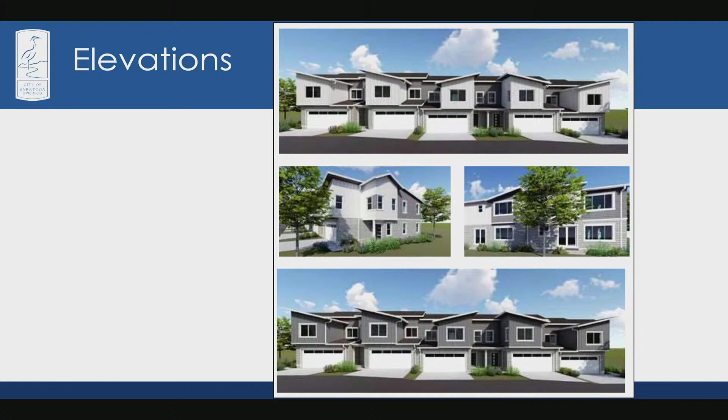So they provided pictures to show what they're going to be building out there as well. It's the same type of development that we've seen in Village 3. And with that, I'd like to turn this back over to the commission for any questions.

Thank you for an excellent presentation. Is the applicant here this evening? Yes, BJ is here. Would you like to add anything to the presentation, if you wanted to? We won't force you, but if you would like to, you certainly can. If you don't mind stating your name and address for the record, sir. BJ Ryan, Lennar Homes, 5370 East Pioneer Fork Road, Salt Lake City, Utah.

We're excited about the community. Again, we have reduced some of the townhomes in the area. This provides better flow throughout the community. It makes the property more functional and puts a little less pressure on us to do retaining walls or other things like that that tend to take away from some of the usability. So we're excited to be here, and we hope you're excited for the project and look forward to a positive response. Thank you. Thanks for being here.

You might have a couple questions from the commission, so if you'd like to sit, you're welcome to sit for just a moment. Thank you for that. I'll turn the time now over to members of the Planning Commission for any questions or comments.

Commissioner Hill. Tippy, again, thank you for that kind of pre-introduction, because I look and, you know, the community plan was February of 2015. It's an ongoing process. As you get closer to building, you want to refine what's going to work for you, and I understand that.

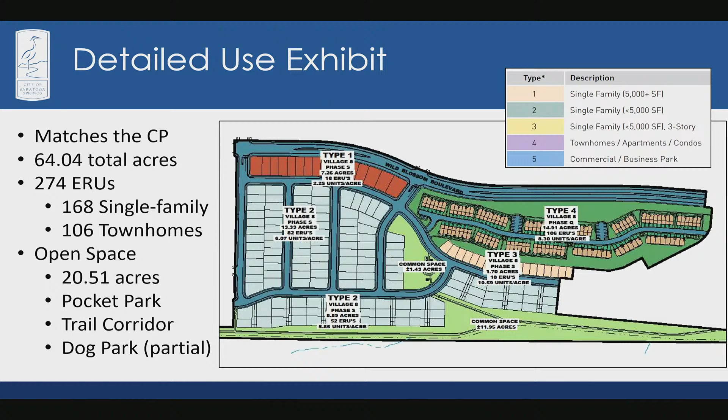Commissioner Sprosty Burns? Yeah, so I was just trying to look at the master plan, the community plan. And with this open space, does this open space that's on the bottom of the screen line up with somewhere else in the development?

Yes, so this is kind of common. This also happens in Mount Saratoga, where each village needs to meet the 30% open space requirement on its own. So sometimes they'll split up or stretch out the open space in a contiguous manner, but it kind of is further from the homes so that they can claim the 30%, for lack of a better word. So that triangle on the bottom right that you see, they have the trail corridor kind of going west of the homes, but also east, and it leads and ends in that little square of the dog park.

So they have a dog park currently under review for site plan in Village 7. So this will be built before they get any approvals in Village 8. So we're okay with the way that was phased for open space, since that would be constructed ahead of Village 8 and all the other open space before they get to the south side of Village 8.

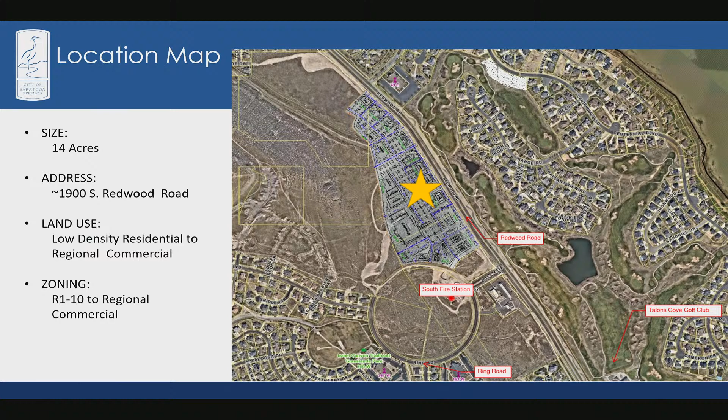On the site, they're proposing 16 lots, which range in size from 5.7 acres to 0.93 acres. Among the different uses proposed in this project are retail, restaurant, grocery, hardware, financial, office, and a fuel station.

This is a concept they've submitted. You can see the layout here, where the buildings are. They've shown a concept that meets our code as far as parking and landscaping requirements. The green lines you see there represent pedestrian connectivity, showing that if you were on foot, you could get around on the site.

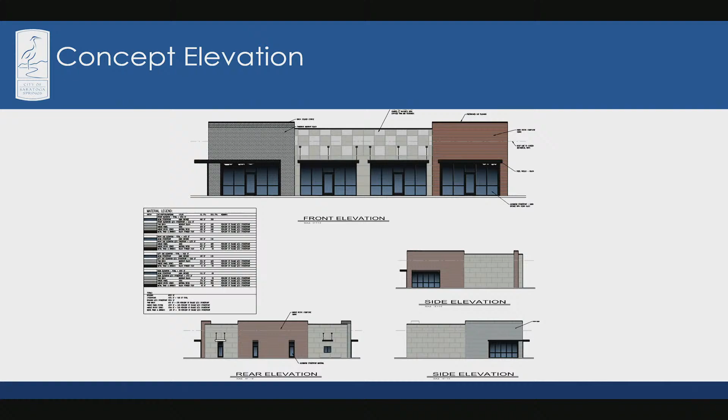They also provided a conceptual elevation for one of the buildings. As this moves forward to a site plan, they would provide further details on the buildings, but at this point it's just a concept that they're showing here.

This just shows some of the differences—basically going from single-family 10,000 square foot lots to a regional commercial product zone. The regional commercial zone allows most of our uses; it's the zone you probably think of when you think of commercial. This is a public hearing, and that's all I have unless you have any questions.

Thank you for the presentation. Is the applicant here this evening? Would you state your name and address for the record, sir, and if you'd like to add anything to the presentation, that would be great.

My name is Dan Ford. I am not the applicant, but I represent the owners, the Jacob family. The Gaskells just texted me—they're in traffic and very close, about 5 minutes ago they said they're 10 minutes out. If you want to do the public hearing, I think they'll probably be back by then, or I could try to answer some questions, but I'd prefer they do it if possible.

Well, thank you, thanks for the transparency, we appreciate that. This is a matter of public hearing, so we will be happy to hear from members of the public at this time. If there are public comments, we welcome you to make those. Please state your name and address for the record, and please limit your comments to 3 minutes or less.

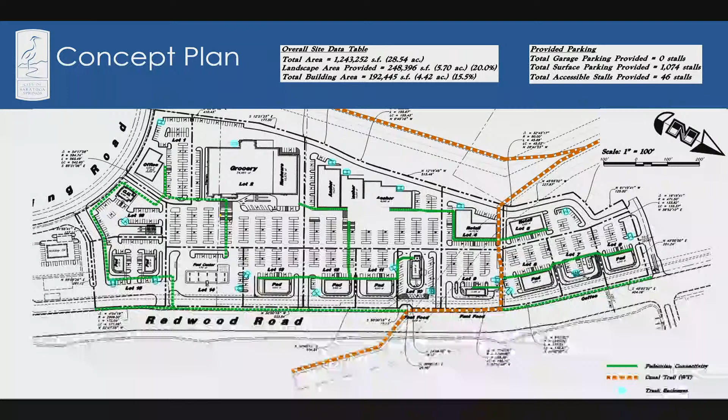Okay, I wanted to bring that back to everyone's attention because we looked at that maybe 3 months ago. This is a proposed zone change, so the things we have now are conceptual, correct? And that's why so much can be compliant, because we're very early in the stage, is that correct? Yes, that's correct. So in the staff report there are a lot of can-complies. We don't expect them to have all of those as complies at this stage, but as they come forward with the preliminary and site plan, they would have to meet all of those.

Okay, so does this property line up and touch anywhere where that applicant came in last time? Yeah, let's go back to that. Let's go to the one that shows... the one with the color-coded zones. Yeah, that one, informative. That one, yes, there we go.

Because if I remember right, one of the issues was that we talked a lot about that phasing from regional to neighborhood, and that was a big sticking point to us of why we didn't want to make that change at that point. And it looks like if it touches there, right, then we would essentially be approving for this, but not for that. So this is when precedent becomes an issue.

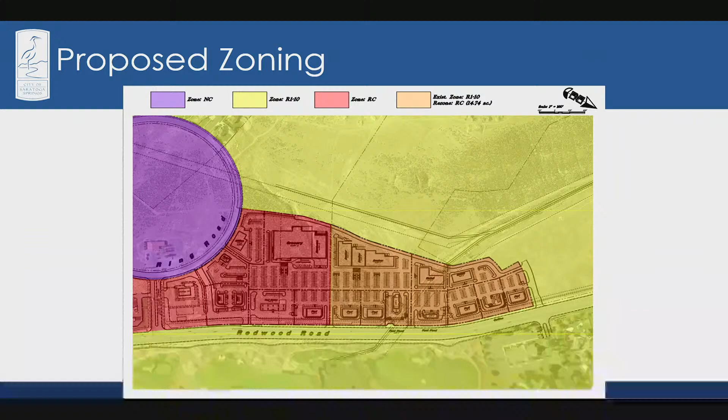Thanks, Commissioner Wilden. I have a few thoughts on this as well that I'd like to share. I typically try not to talk too much about these things and let the commission work through them. But, I live a half a mile here as the crow flies from this proposal. And I think, being a South Ender, it is becoming increasingly more difficult to get to services and more frustrating to get to services.

So I think that's an incredible pro to considering this change - there's a strong possibility that we take a large portion, even where there's a lot of build out still to remain in the south end of the city. I think it also serves future citizens. That's the hardest thing we try to do here, is gaze into that crystal ball and decide timing and population growth. Those are incredibly difficult to understand. But what we do have now is an existing option before us.

For me, the thing that sways my opinion on this is we already have regional commercial sitting right there. And when we run the distinction between regional commercial and neighborhood commercial, in my mind they're pretty arbitrary distinctions. I mean, if we're talking about a hardware store and a grocery store, I want those things. And I understand why we have the difference between the two, but for this application, it seems to me that it's almost a moot point with regional commercial already sitting there.

And regardless of the action that we take tonight, we're going to run into the problem that is already there with the R1-10, with the regional commercial currently sitting there. That's a thing that we're going to have to address at some future point. I think we've had a lot of discussions from the Planning Commission of late of how we can help mitigate some of those things as our city grows and zones start butting up into one another, and things we can ask developers to do to help mitigate as those zones come up to each other.

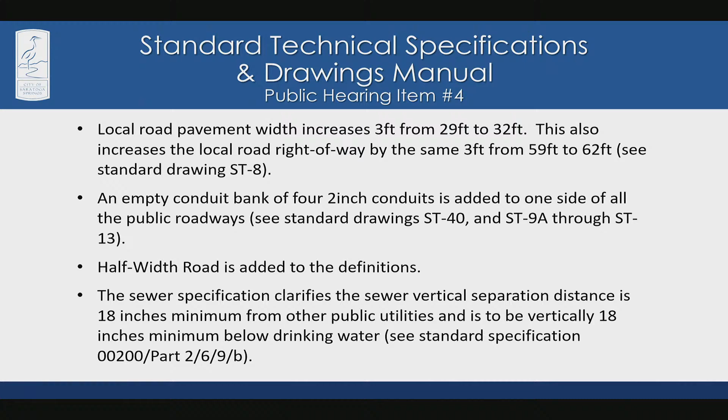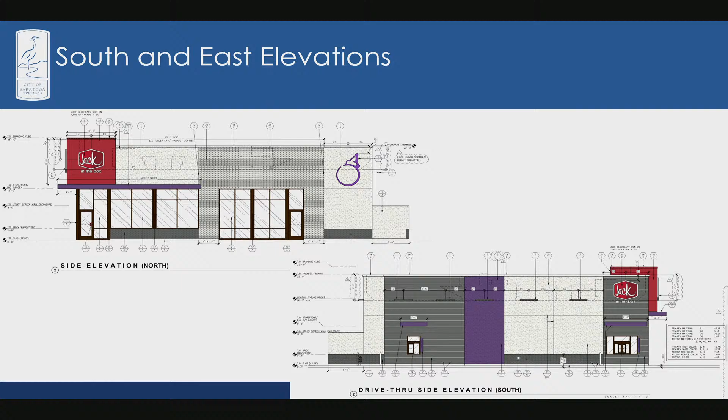It's really pretty cut and dry. We don't have any concerns with this one. There is one item in the checklist that was a can comply, which was they need to add some additional evergreens to buffer the parking.

So I would recommend that the Planning Commission add that as a condition to the motion. Thanks. Any additional thing for the presentation that you'd like to add? I believe, let me just check my notes here. I think that's it. Thank you. Okay, is the applicant present this evening?

Would you like to come up and add anything to the presentation? I thought I saw a hand wave above the shoulder there. If you don't mind stating your name and address for the record, that would be great, and you're welcome to have a seat there. Sure. My name is Karen Wallace, and my address is 8383 158th Avenue Northeast, number 280, Redmond, Washington, 98052. Thank you. Welcome.

I've been working with Gina. We've been going back and forth with the comments. We added some landscaping where we had some stripings. That landscape island at the north there is new, and that was required for the end of the parking spaces. We have gone back and forth a little bit on some of the landscaping, determining where we could locate trees to best help with the visibility of the restaurant.

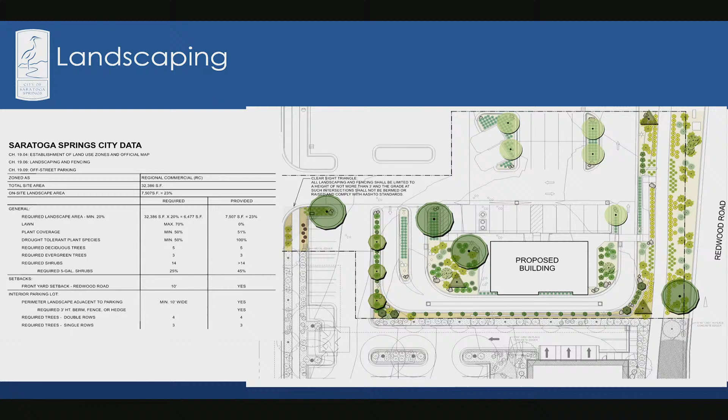We'll now open it up to members of the commission for questions. Commissioner Hill. Go back to the picture that shows how to get into that portion of where the businesses are going to be. Is it going to be the road that takes you directly to Home Depot?

So, yeah, let's see if there's a better image. I think this might be the best one, I'm not sure. I wish we had a more zoomed out one, or maybe we could go to the city map, but yeah, the main access would be on the west side here. Okay, so opening up to all that development going on, over kind of where Home Depot is. Thank you, that's all I had, Chair.

Thanks, Commissioner Hill, great question. Commissioner Kilgore. Since this is an administrative process, I'd just like to always ask, is the applicant willing to comply with all the conditions in the staff report? Yes. Okay, terrific. And thank you for a very clean application. I did see that one can comply, and we already addressed it, so it's terrific. Thank you.

Thank you, Commissioner Kilgore. Any additional questions or comments from members of the commission? Hearing none, I'm happy to entertain a motion. Okay, so I move that the Planning Commission recommends approval of this to the City Council of the proposed Jack in the Box site plan located at 1303 North Redwood Road with the findings and conditions in the staff report, in addition to a condition that evergreens should be added at a mutually agreeable location.

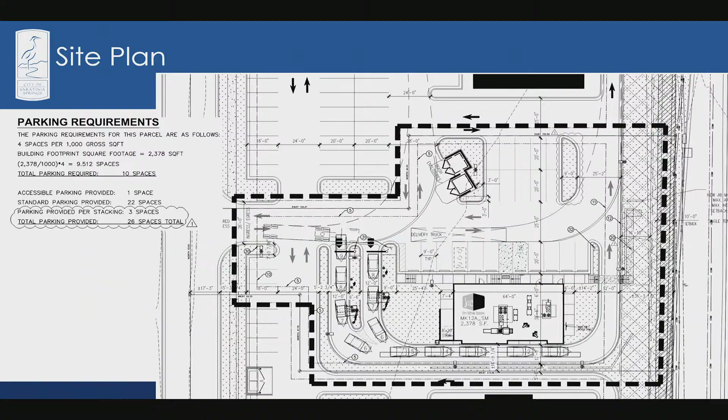I just want to say thanks again to staff for the great presentations this evening, for how prepared everyone was, and for the applications that came in. It's very clear that there's a lot of work done on the front side of these to have them come up to us as they are, and the ability that we have to review them. So thank you to everyone involved this evening in preparing those and getting that ready for all of us.

We'll move to Director's report. On behalf of Sarah, I have a couple of items for you all today. The first is a report on the City Council meeting from May 7th. All three of the items that the Planning Commission recommended and forwarded to the council were approved: the Raising Cane's Site Plan, Connectivity Standards Code Amendment, and the South Fire Station Site Plan Amendment.

And then for our next meeting on May 30th, we will have our Open and Public Meetings Act training at the end of the meeting. At that time, we'll move to the conference room, have refreshments, and have some space for Q&A. So if there's also any questions you've been wanting to ask about being on Planning Commission, about our code, or anything related to your post as a Planning Commissioner, please bring those questions to that meeting. And that's all that I had from the director.

Thanks. You ready for that? Rulon, are you going to be doing that for us? Because Fred set a really high bar, so good luck.

Yeah, all right, thank you. We look forward to that. It's important to have those training sessions. I'll remind everyone, that's actually a good note, Don, is we are responsible for training on our own as well, and we're about almost halfway through the year, so it's a good opportunity to take advantage of training as members of the commission.